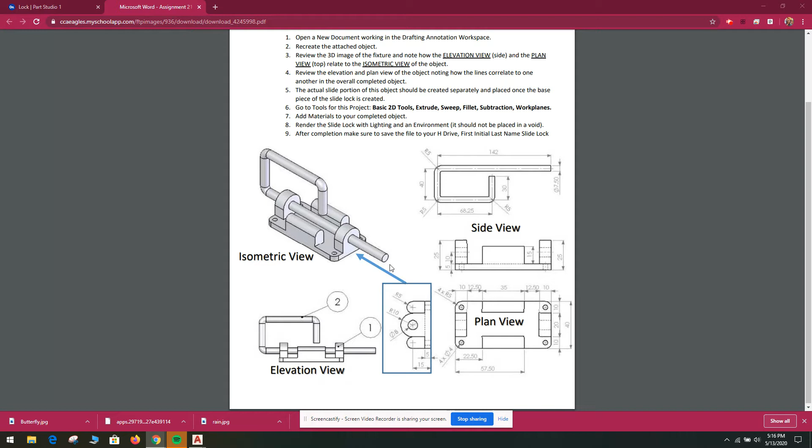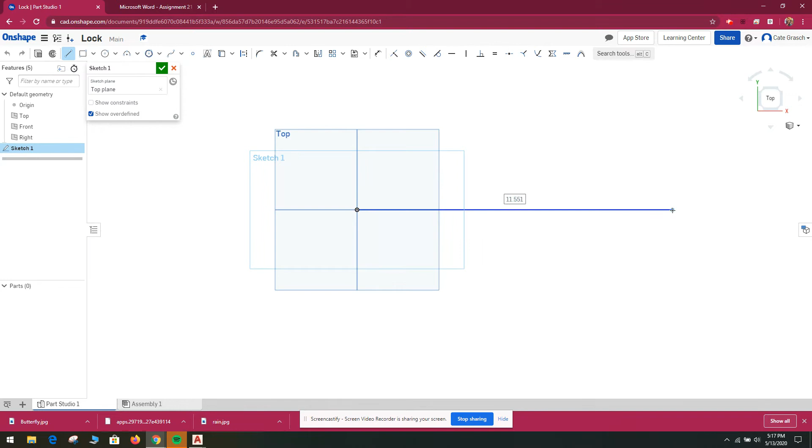But what you have to realize is that you have to make your path on one plane, and then your circle needs to be on the complementary perpendicular plane. So what we're going to do is I'm going to choose this top plane for my first sketch portion of the sketch, which is going to be the arm. Okay, so I'm going to go from the center line, and I'm going to make sure I'm going straight out. And then I'm going to go, it's going to get all kind of crazy because, all right, there.

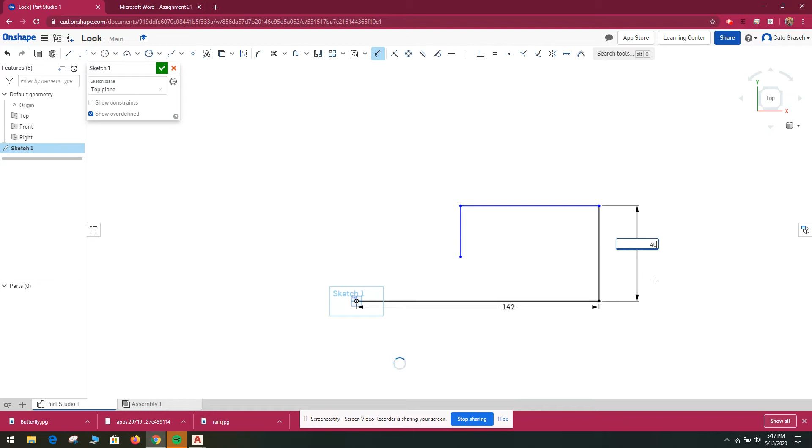Right. So now remember we have to recreate these to what they need to be. So that needs to be 142. So it's going to get a little crazy here. Then this one needs to be 40. You see how it stayed in the same ratio? Oh, come on. Okay. This needs to be 68.25. And then this one, you can do it, needs to be 30. Okay, so this is what we have if you look at this path.

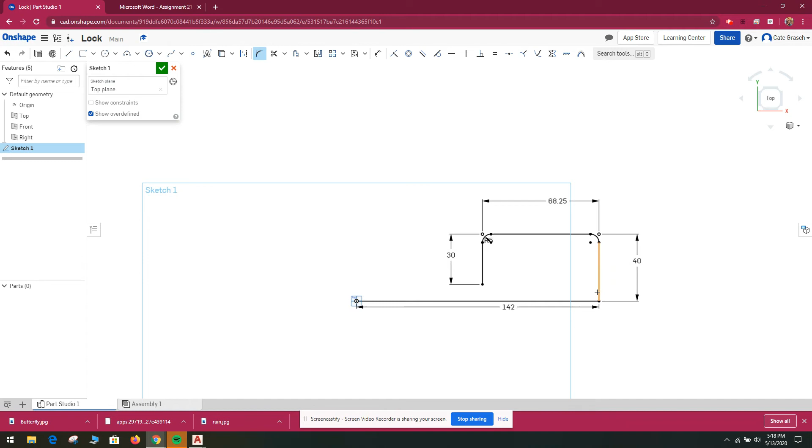Now I need to get these radii in here. It's at 5. So just come into your sketch, and you'll pick 2 arms. It already has a radius of 5, but you can double click on that if you need to change it. Okay, and then the tool's still active, so I'm just going to keep doing that, and the 5 should remain active as well. So I just need to do that radius on 3 of them. So now I have this portion of my drawing on this one plane. So now I'm going to say I'm happy with that.

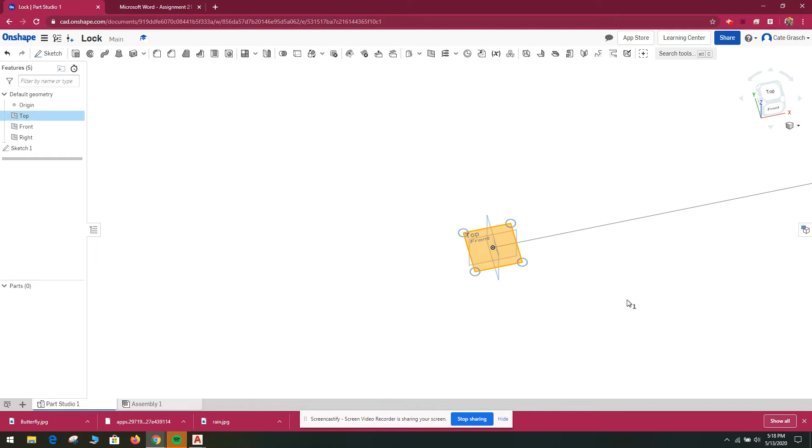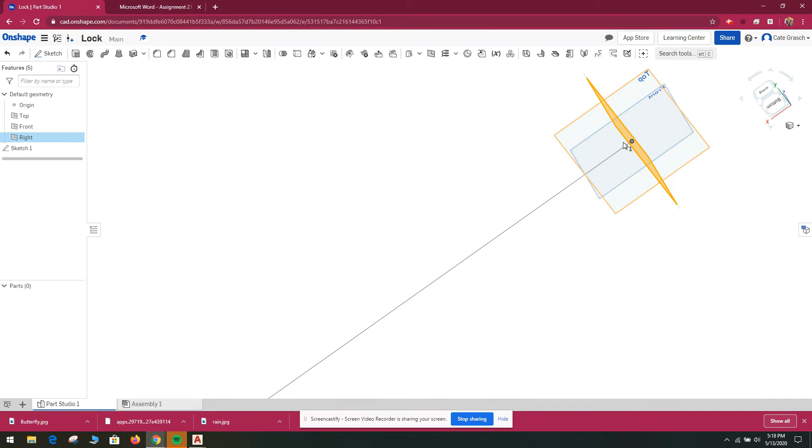And I'm going to zoom in, and on this plane here, the right plane, not the top, I'm going to do a sketch. Now the reason I'm picking that one, if you can tell, is see how it's 90 to my top? And it's also allowed me to do a center point, which works out pretty well for this specific project. So what I'm going to do now is go ahead and pick another sketch. I want it on this right plane.

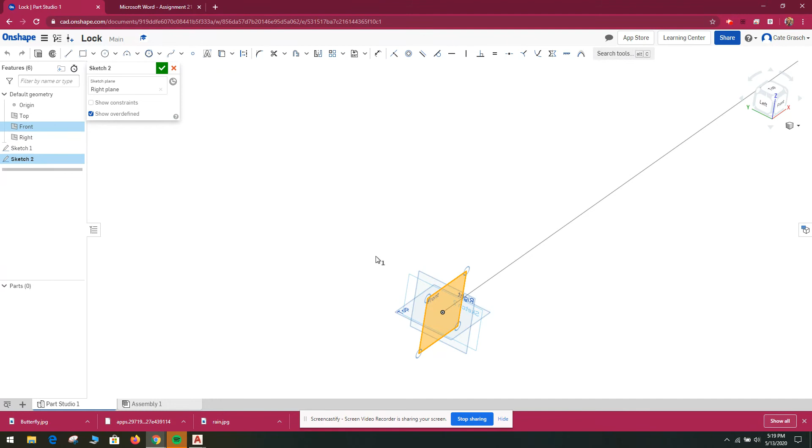Okay. So if it lets me, I'm just going to select my plane, maybe. I don't want to pick any other plane. I want to pick the right plane, and it won't let me. That's why this program makes me so happy. No. This one. Turn that one off. And I want this one. Oh, it's already there. And then I'm just being wise, I suppose.

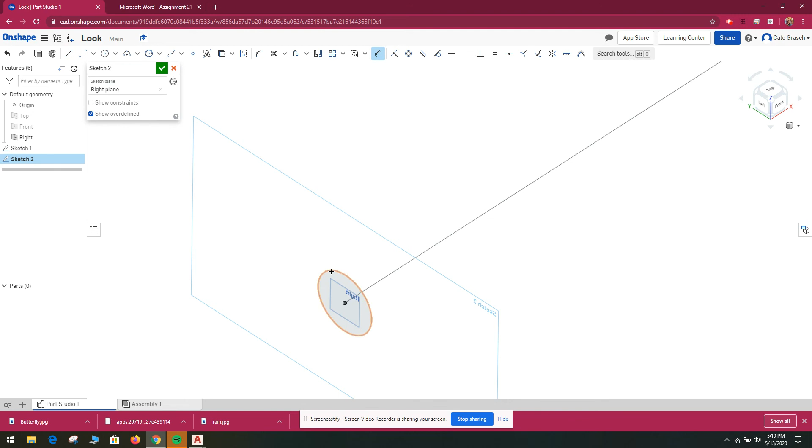So I'm going to select this, and I'm going to make a circle. Now, I don't want my circle to be that big. Remember, the cutout of this slide lock that we were making this for is 8. So we want this one to be 7.5. So I'm going to go ahead and make that 7.5. See it? And then you see that this is already kind of piercing the center point of that circle. Okay. So now I'm going to say okay.

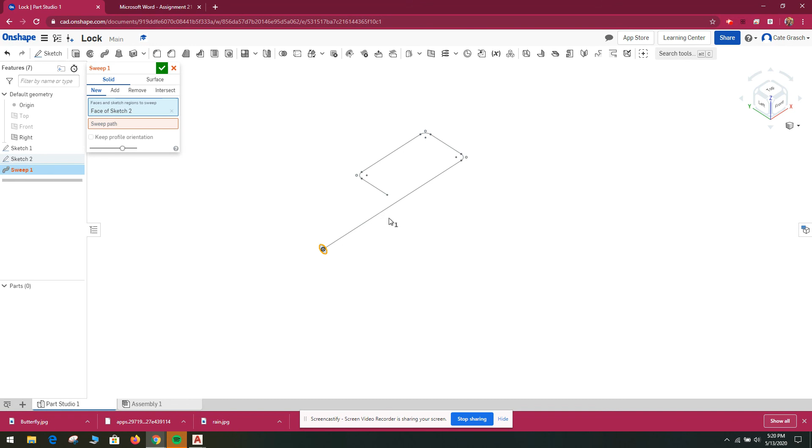And then I'm going to pick sweep. And I want it to be solid, and I want it to be new. So I want this to be the shape. And then I'm going to go ahead and go to my path, and I want this whole piece to be my path. Okay. And that should do it for the locking portion of the slide lock.